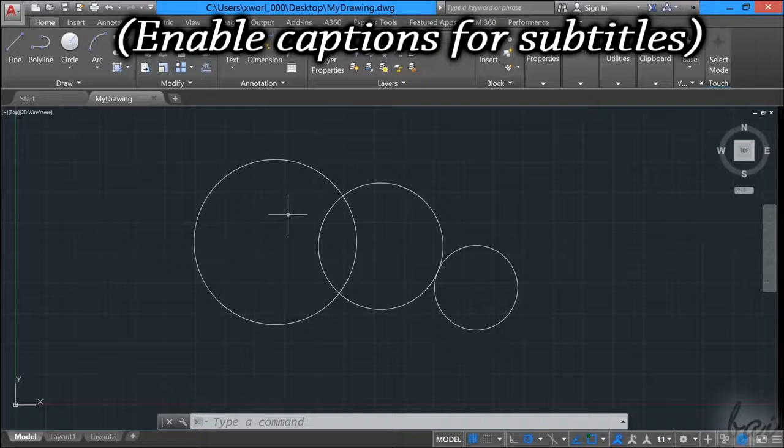AutoCAD is one of the best products used to create 2D and 3D designs and CAD projects. When you open it, you will be directed to the Start section.

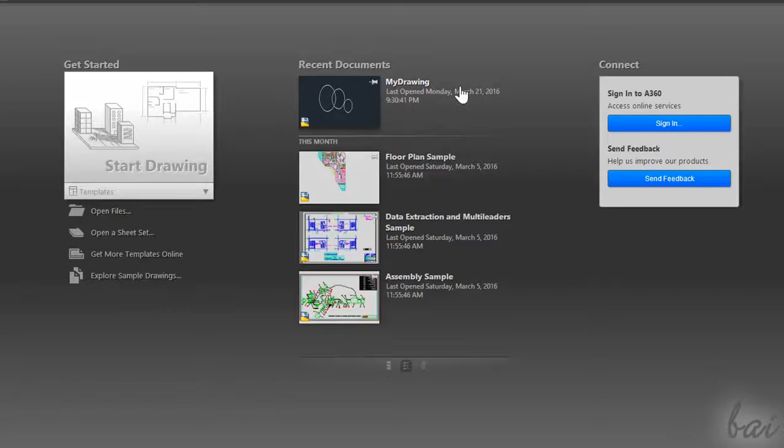Here on the right, you can check all notifications from Autodesk, or start a new project by clicking on Start Drawing. On the left, when you have AutoCAD projects saved, you can use Open Files to open them, or simply browse directly from recent documents in the middle. Let's just create a new project to see how to use AutoCAD.

The general workspace is composed of a huge space used to draw and show your project. Above, you have all the tools and features available inside AutoCAD that we will see through this guide. Below and on the right, you have the command line and some more useful tools we will see.

This workspace is fully customizable. If you go to View above, you can hide or show elements from your workspace. And on top, you can click on the small icon to size the workspace as you like.

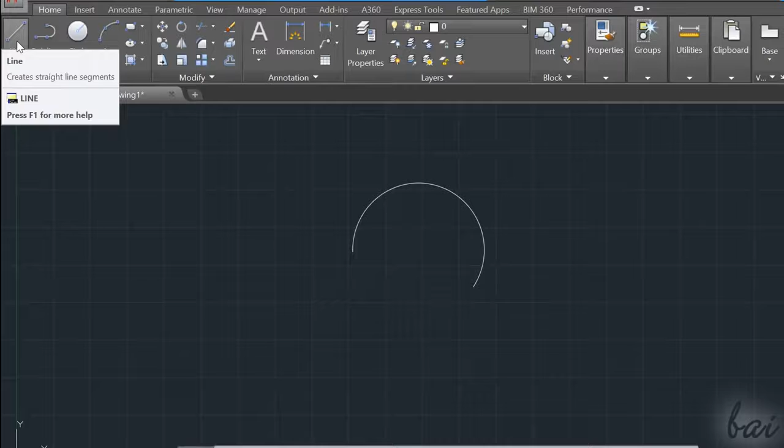Let's start drawing. Inside the Home tab on top, you have all tools used to draw in 2D. If you hover on a drawing tool, you will get quick instructions about how to use it. This is quite useful, especially when starting for the first time.

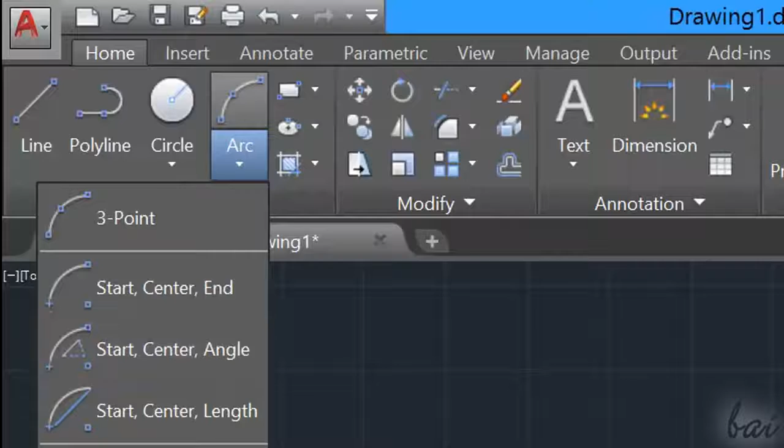Some of these tools contain more features inside. In this case, they show a down white arrow. If you click on it, you will have different ways to draw the same kind of object.

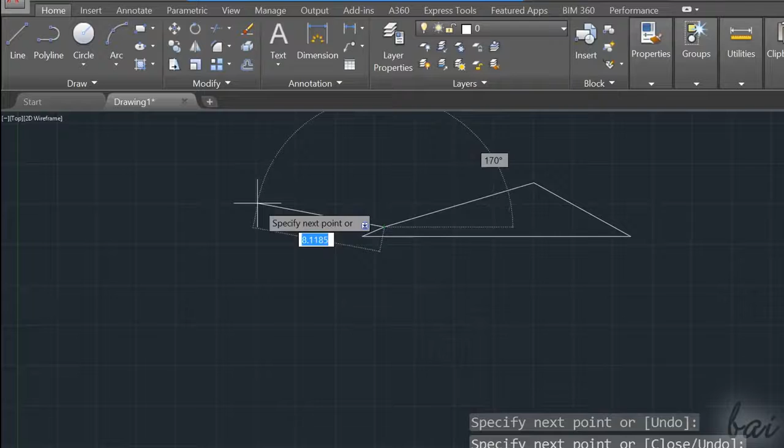Use the Arc tool to draw arcs instead. Use the Rectangle and the Polygon tools to draw regular polygons. Use the Ellipse tool to draw ellipses.

While you draw inside your project, AutoCAD always shows a preview of the object, showing length and angle measurements. The object will be actually drawn when you fix the last point required. Depending on the tool chosen and on the object shape, you may need to fix points, distances, or angles.

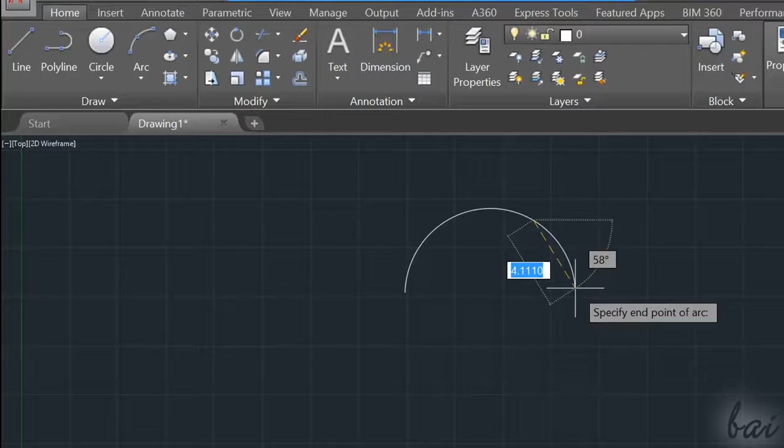For example, if you choose to draw a 3-point arc, you have to fix a first point as center, fix the radius with the second point, and then the third arc angle with the third point. If you press the Enter key, it will enable you to use the last tool that you used. Use the Escape key to undo your current drawing instead.

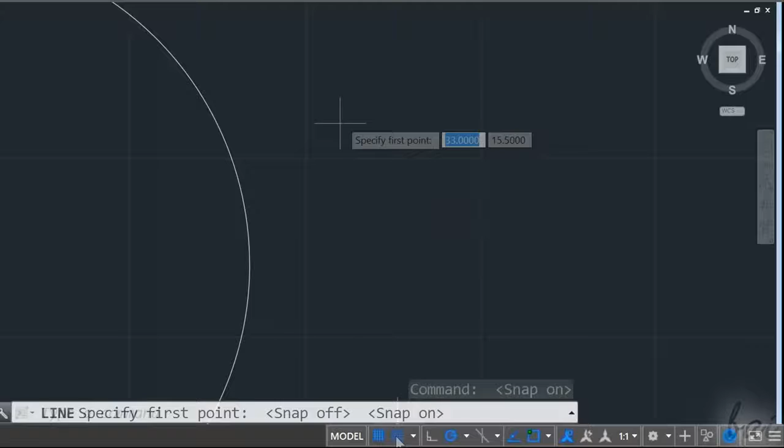While you draw, you can use snappings to make drawings easier. You can adjust these in the bottom right corner. If you turn on Snap Mode, you will snap your pointer to the grid points on your workspace. Turn on Ortho Mode to draw following just vertical and horizontal directions. To turn off, just click on these icons again.

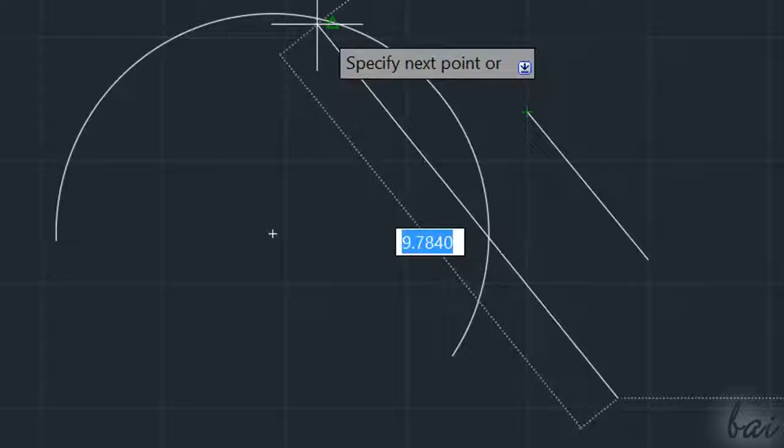You can also use snappings to objects through Object Snap. This sets snappings to object key points. For example, all vertices and endpoints are represented through green squares, centers through green circles, intersections through green crosses, and midpoints through green triangles. If you click on the white arrow next to Object Snap, you can enable and disable the object snappings you need.

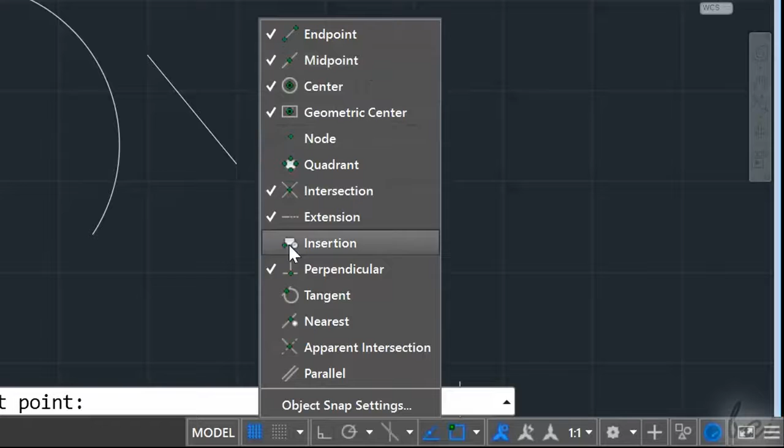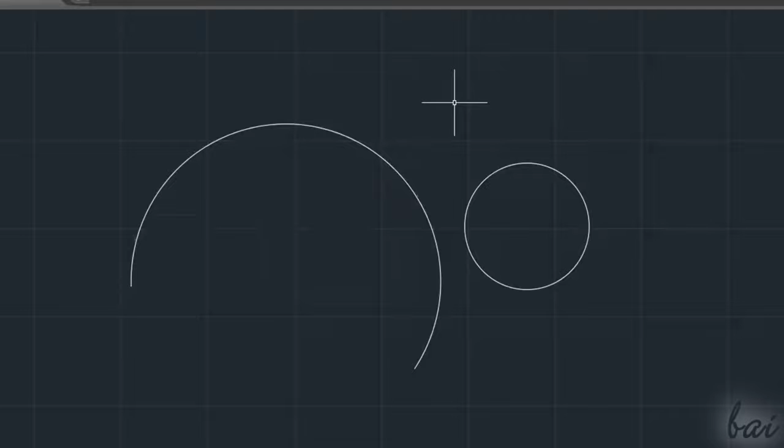When no drawing tools are enabled, your pointer works in selection mode, used to manage and edit your objects. For example, if you hover on an object, this will be highlighted with a dialog box showing some information like the kind of object and its layer. If you want to know more about groups and layers, check out the related video in this guide.

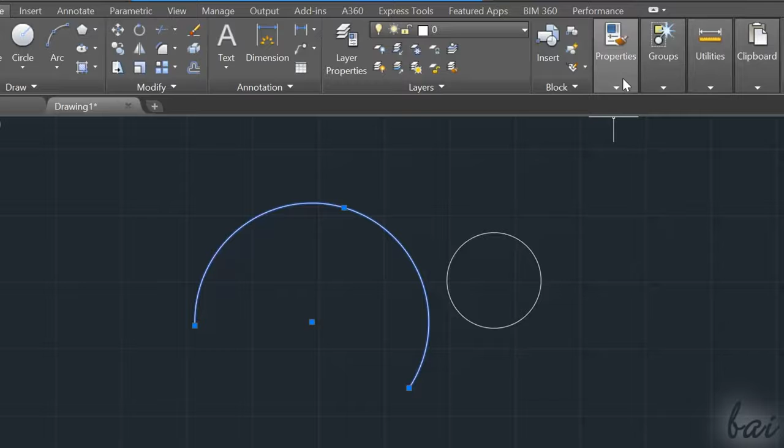If you click on the object instead, you will select it and this will be highlighted in blue. So you can edit it by going to Properties on top in order to change the line color, thickness, and style, or add some transparency to it.

To delete the selected object, just use the Delete key. To cut, copy, and paste it, use Ctrl+X, Ctrl+C, and Ctrl+V. If you ever make a mistake, use Ctrl+Z or use the Undo button in the top left corner.

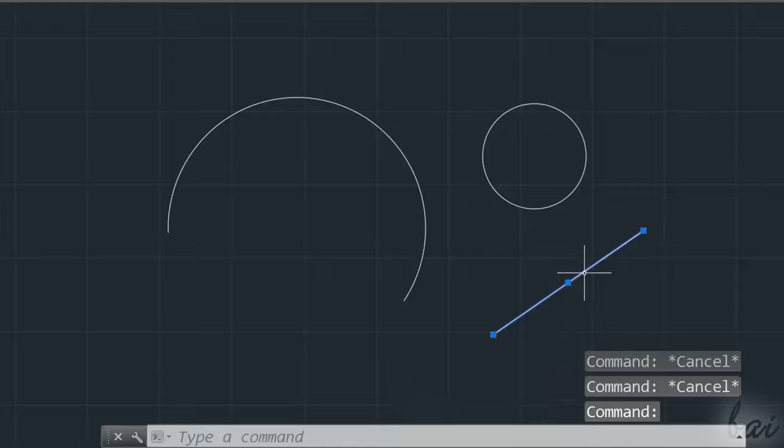When an object is selected, you can also edit it through its own blue nodes. For example, you can use the central node inside lines, circles, and arcs to move them around your workspace. Use the other nodes to edit length or shape.

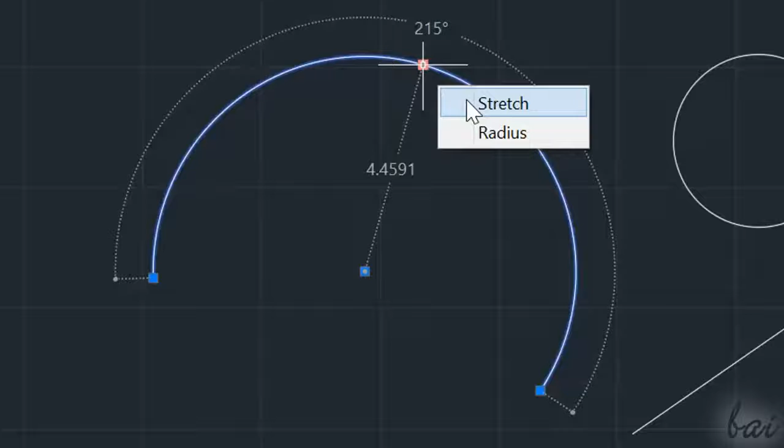If you hover on those, you can check measurements related to radius, length, and any angle of the selected object. There is also a dialog box with options that change depending on the node and the kind of object. Use Stretch to adjust the object shape by moving the blue node.

Use Lengthen to stretch without changing the basic object shape. Use Radius to stretch any radius. That's how lines, circles, and arcs behave.

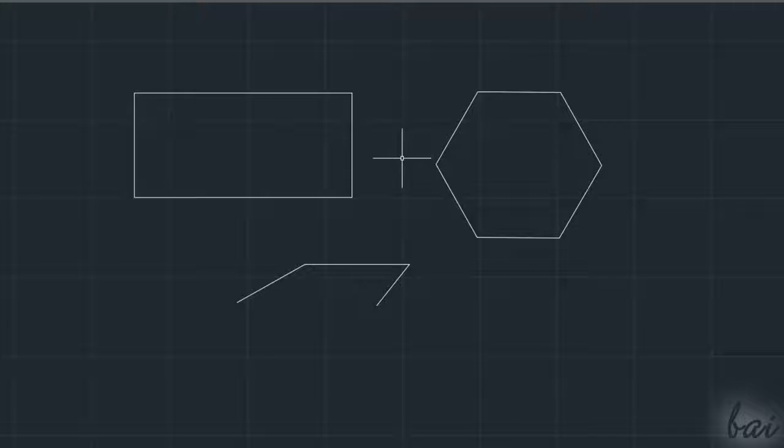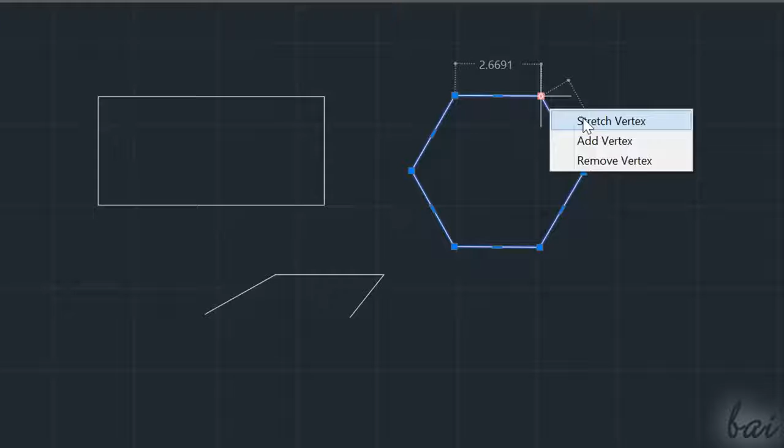In AutoCAD, you also have another important group of objects, which are the polylines. These are made with the polyline, the rectangle, and the polygon tools. Inside those, you have big and smaller nodes. If you hover on the big ones, you adjust the polyline vertices. Use Stretch Vertex to move the vertex. Use Add and Remove Vertex to add or remove vertices.

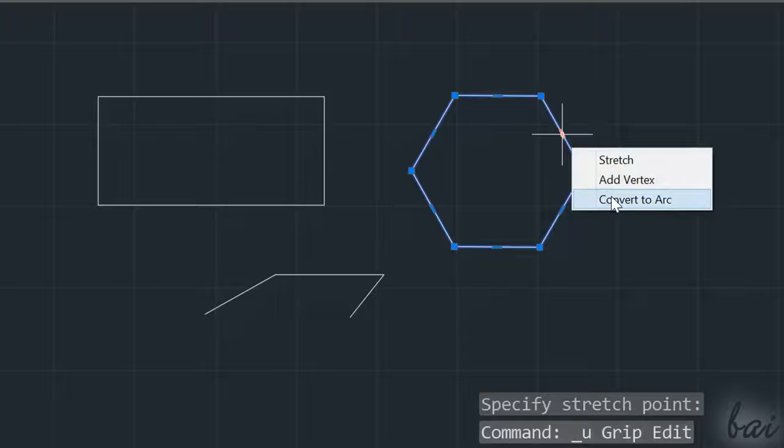The smaller nodes are used to adjust the polyline sides. These sides can be either straight or curved. Use Stretch to stretch the side, or use Convert to Arc to convert it to a curved side.

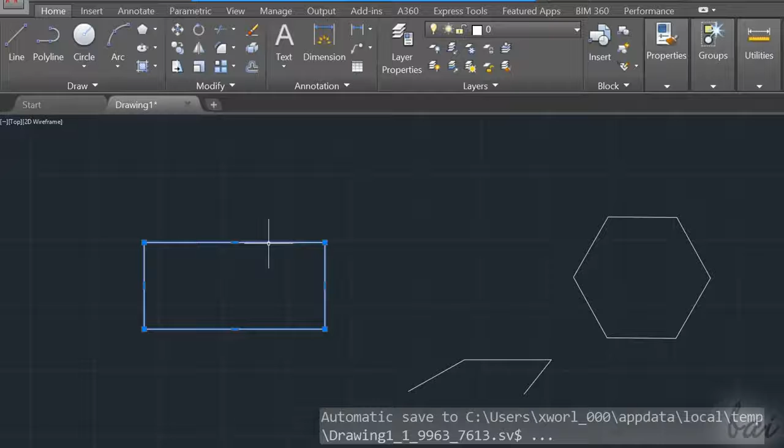Unlike lines, circles, and arcs, inside polylines you don't have any centered node to move them directly. To do so, you have to use the Move command inside the Modify section on top. You can use this tool in two ways: you can select the object first and then enable the tool, then just click and drag to move.

But you can also enable the tool before selecting any object. In this case, your pointer will turn to a small square. Select all objects to move, apply with the Enter key, and then click and drag to move.

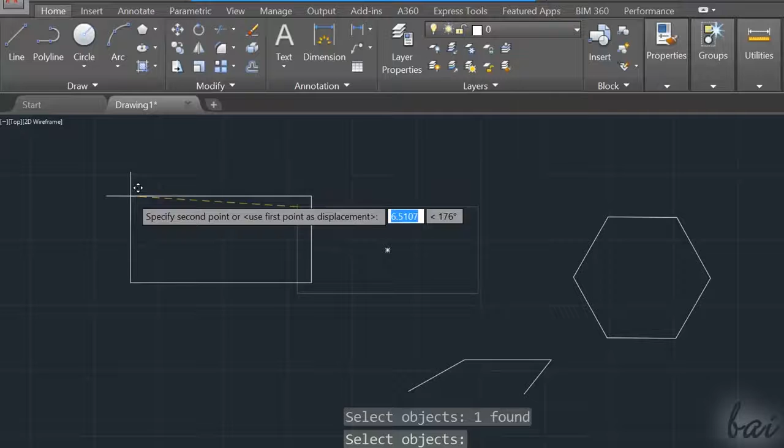Under the Modify section, you have other tools to edit your 2D objects. Check out our next video to know how to use these.

In case you want to edit more than a single object at the same time, you can select more of them and then apply your changes.

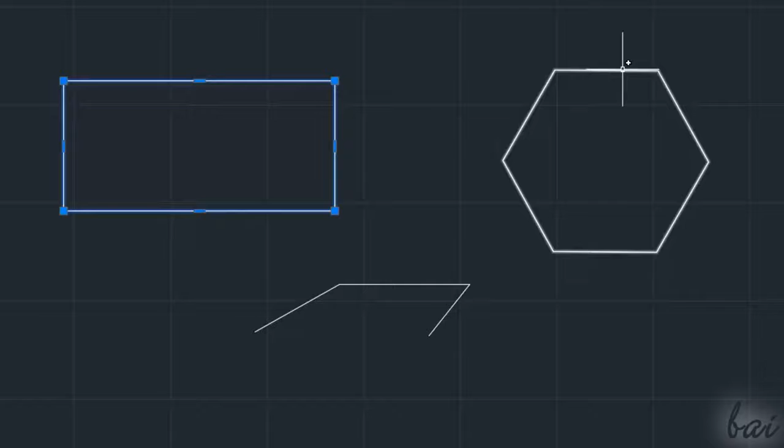Click on your objects one by one to select them. In this case, a plus sign appears close to your pointer. To deselect an object, just click on it while holding Shift down. You'll have a small minus sign in this case.

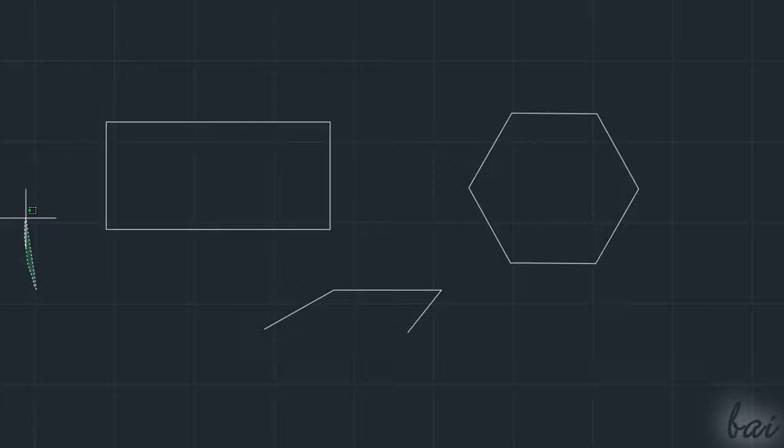To select lots of objects, you can use the lasso selection. Just click and hold while dragging. If you drag from right to left, you will use a crossing lasso that selects all objects that simply touch the green area created. If you drag from left to right, you will use a window lasso that selects just all objects that are fully contained inside the blue area.

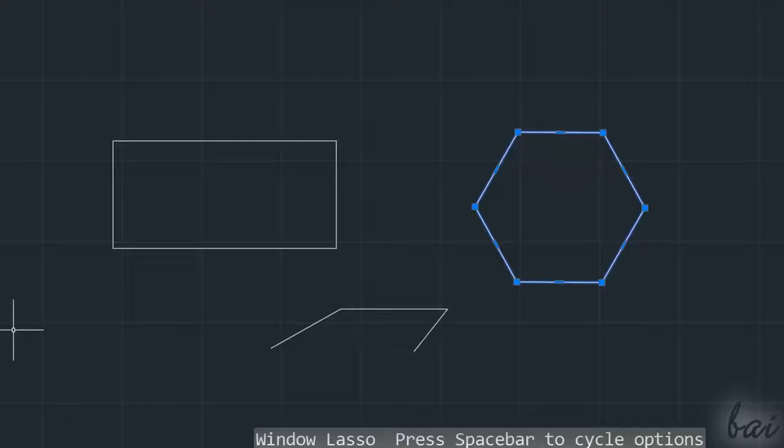You can quickly undo all selections by using the Escape key.

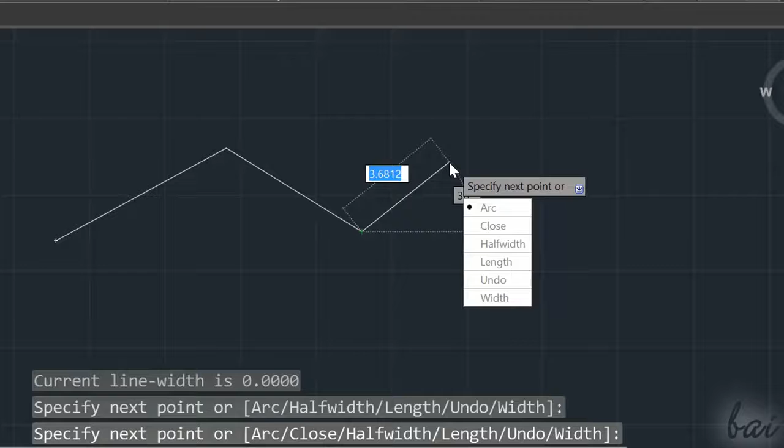There are lots of options that can personalize your current tool. For example, while you draw, there is a dialog box beside your pointer. If you use your down arrow key, you will open its options inside, which change depending on the tool you are using. Through the up and down arrow keys you choose in this list, and use Enter to apply. So if you draw a polyline, you can go to Arc to draw an arc instead of a straight line. If you draw a rectangle, you can fix it by defining area or any length.

Something that's also very important in AutoCAD is the command line at the very bottom. This is used to apply and launch commands quickly with your keyboard only. For example, if you type A, the command line shows you the full list of AutoCAD commands that start with such letter, so you can choose with your down and up arrow keys and use Enter to apply.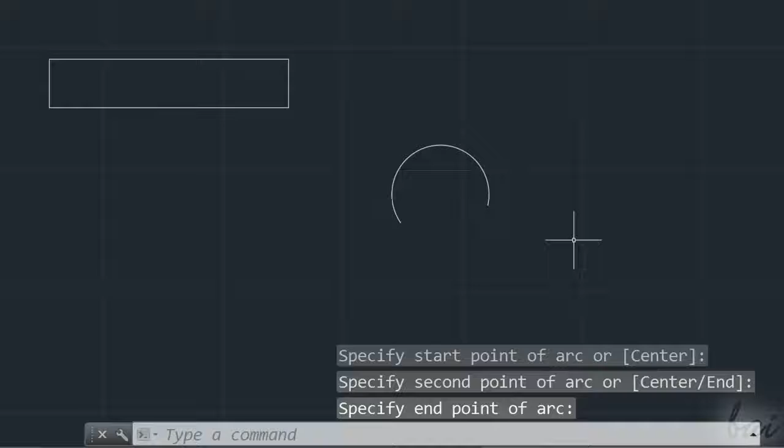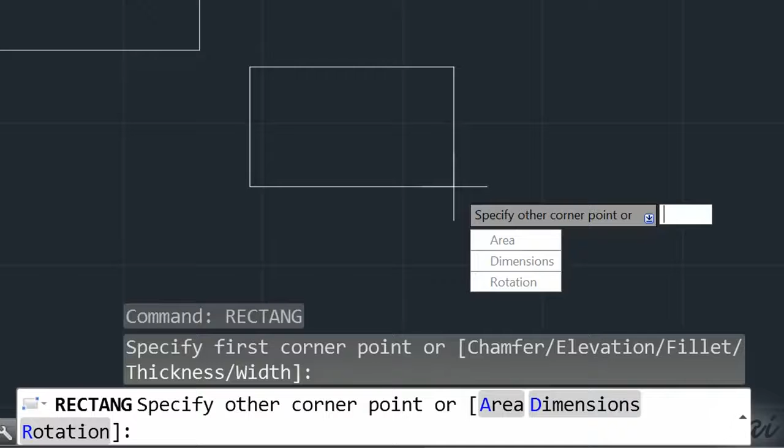If you type and choose Rectangle, you will enable the Rectangle tool. While using the tool, the command line shows you the same extra options seen before in the dialog box close to your pointer. Such commands have some letters in blue. This means that if you type such letters and use Enter key, you will enable the option related to such letter in the command line.

While you draw, AutoCAD shows you side length and angle measurements in preview. If you need to fix a precise measurement, you can type directly from your keyboard and use Enter to apply.

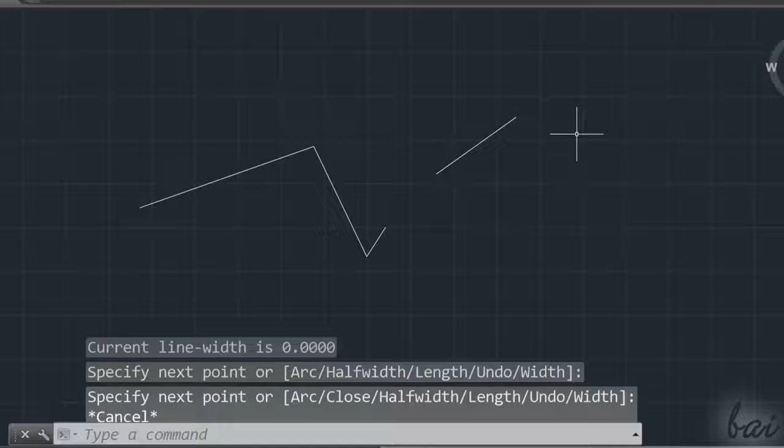To enable the latest tool used, use the Enter key. To enable an older tool used, use your up and down arrow keys and use Enter to apply.

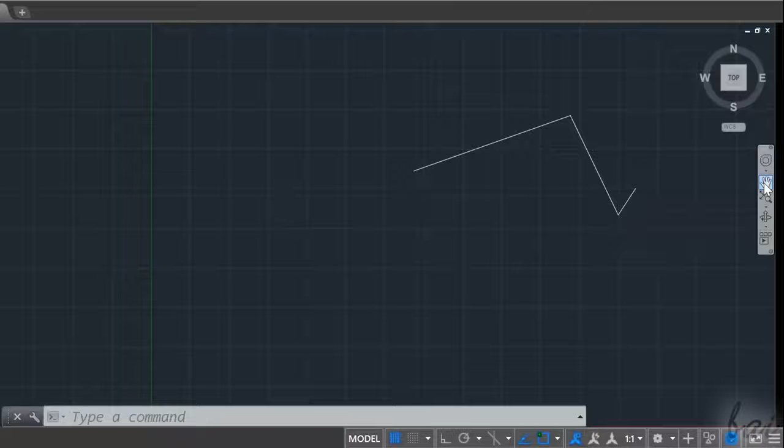Let's see all you need to know to check and preview your project in progress. Use your mouse wheel to zoom in and out. To move around, enable the Pan tool on the extreme right and click and drag, finishing with Escape. To rotate your point of view, you can go to the Rotate buttons on the extreme right, in the top right corner of the 3D View cube.

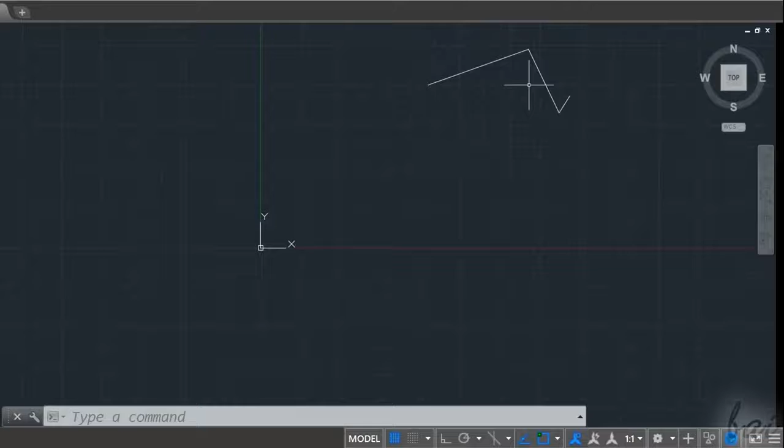You can check your point of view through the gizmo system in the bottom left corner. This represents the Cartesian system of the project: the x-axis for the horizontal direction in red, and the y-axis for the vertical direction in green.

If you click on the gizmo, you can use the squared node to move it, and the other ones to rotate it. This will rotate the grid, but not the objects in your workspace.

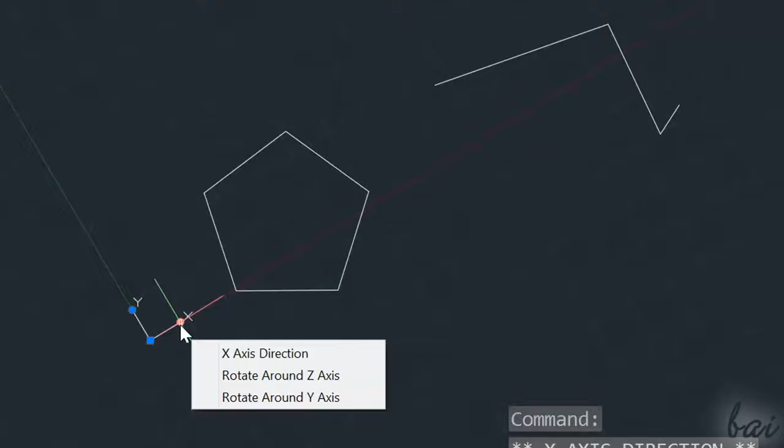Once your project is finished, save it by going to the AutoCAD icon in the top left corner and then to Save As. These are saved in a .dwg format and can be opened in a future session of AutoCAD.